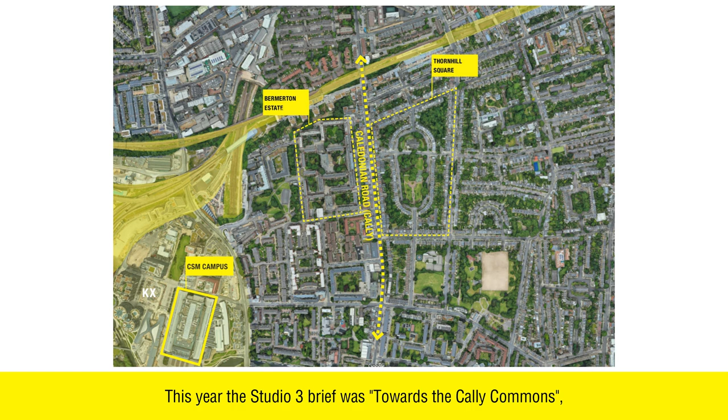This year the Studio 3 brief was Towards the Cally Commons, looking into the idea of the Commons as a catalyser for social change, aimed at improving local equality and sustainability around the Cally, a well-known high street within Islington, only 10 minutes walk from King's Cross. Each student was tasked to explore local resources around the Cally and to imagine how a common city would materialise architecturally.

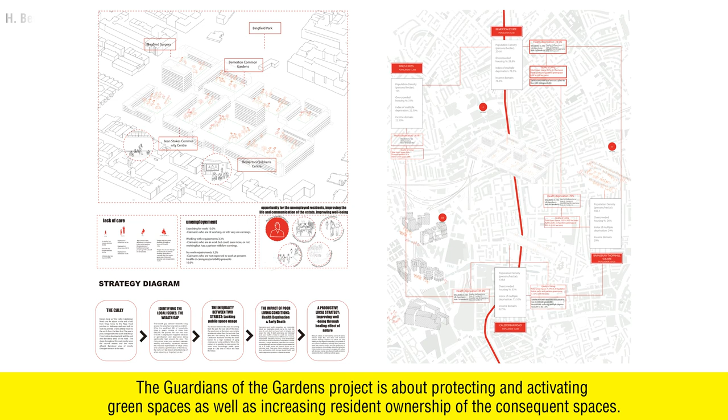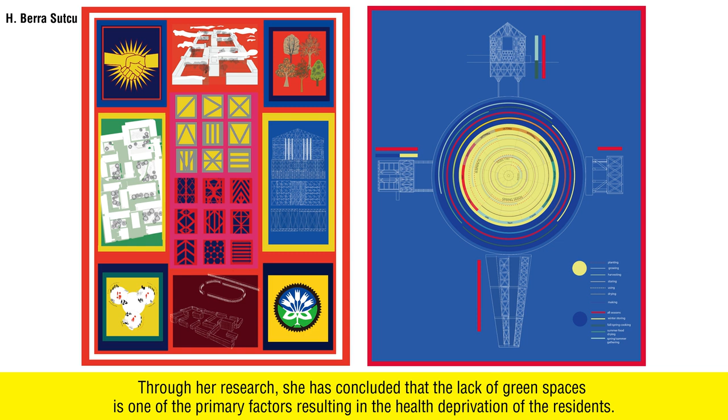Berra's project is titled Guardians of the Gardens. It is about protecting and activating green spaces, as well as increasing resident ownership of the consequent spaces. Through her research, she concluded that the lack of green spaces is one of the primary factors resulting in health deprivation of the residents.

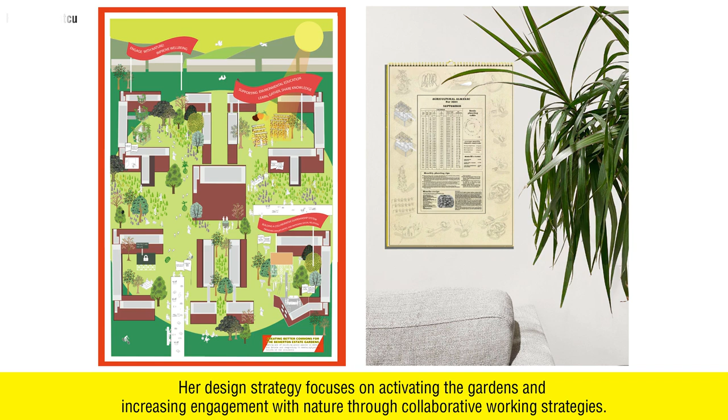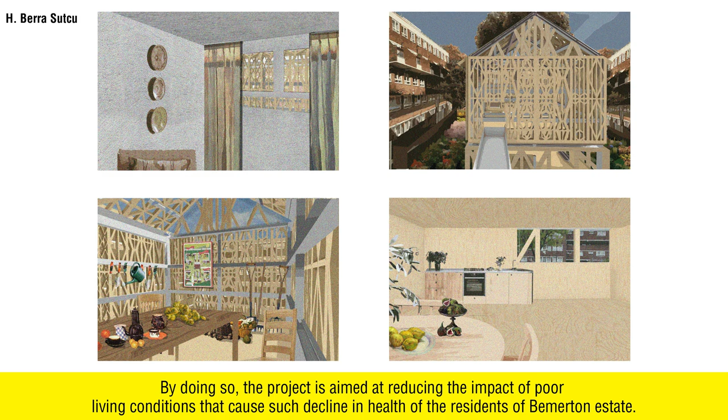Her design strategy focuses on activating the gardens and increasing engagement with nature through collaborative working strategies. By doing so, the project is aimed at reducing the impact of poor living conditions that cause such decline in health of the residents of the Bemerton estate, which is one of the highest recorded deprived areas around the Caledonian Road.

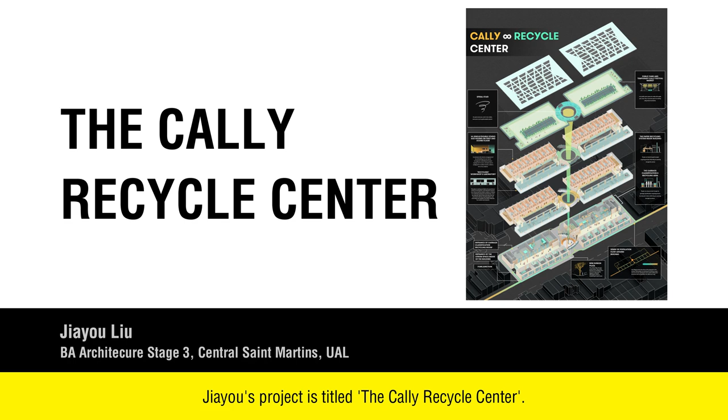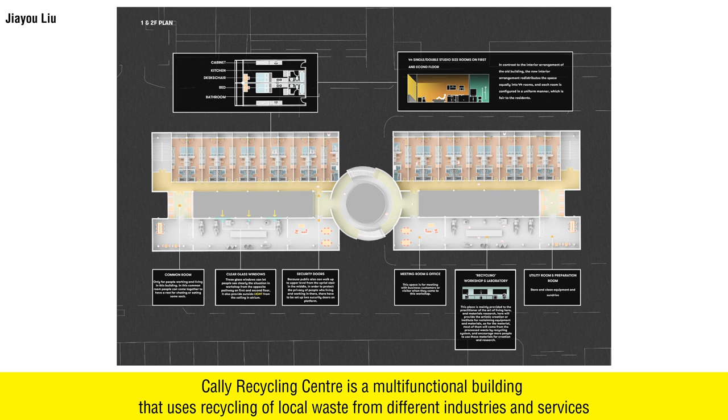Jiayou's project is titled the Cally Recycle Centre. It is a multifunctional building that uses recycling of local waste from different industries and services to develop spaces for commerce, accommodation and education.

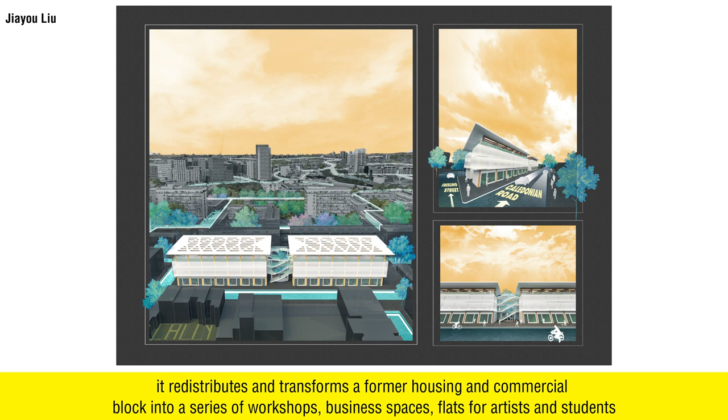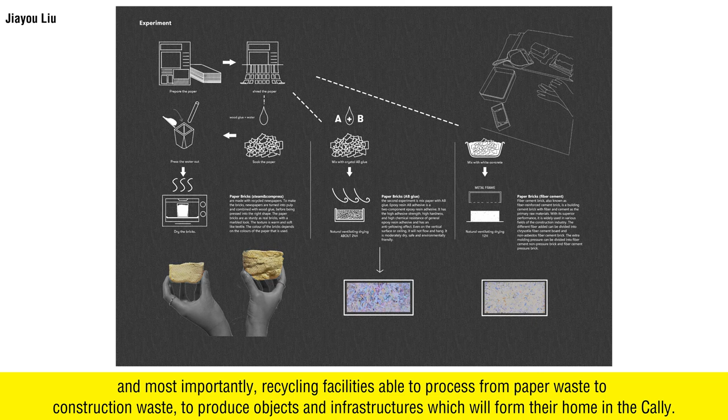While addressing the needs of local people for public space, it redistributes and transforms a former housing and commercial block into a series of workshops, business spaces, flats for artists and students, and most importantly, recycling facilities able to process from paper waste to construction waste to produce objects and infrastructures which will form their home in the Cally.

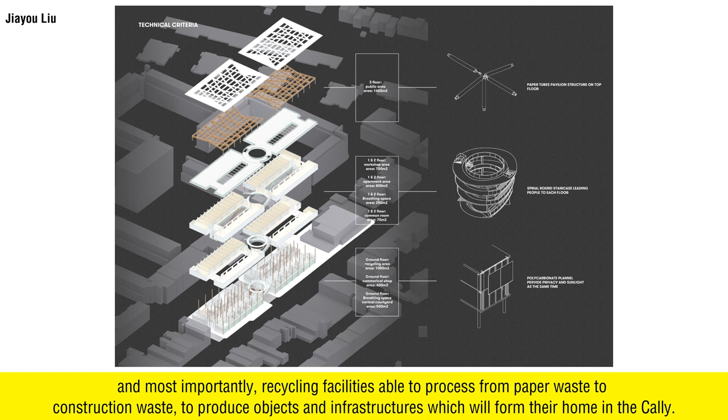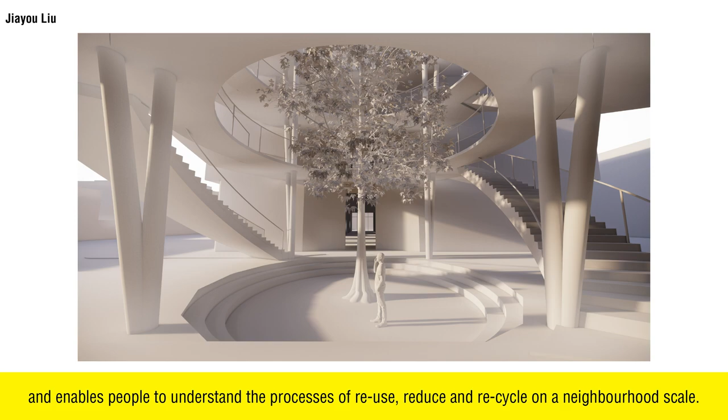In addition, the integration of local recycling systems improves the efficiency of local waste management and enables people to understand the processes of reuse, reduce and recycle on a neighbourhood scale.

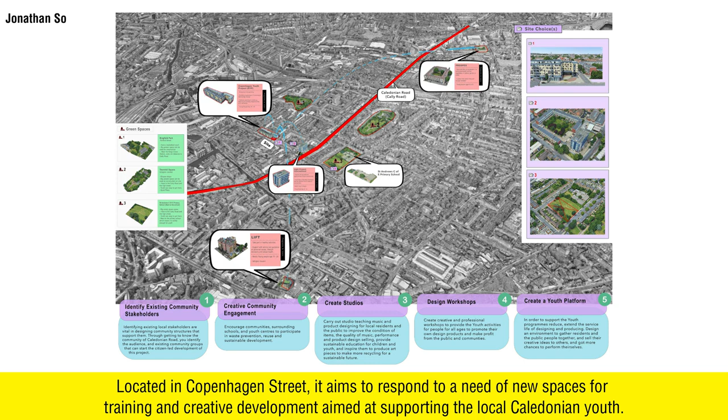Jonathan's project is titled the Sea Youth Square. Located in Copenhagen Street, it aims to respond to the need for new spaces for training and creative development aimed at supporting the local Caledonian youth.

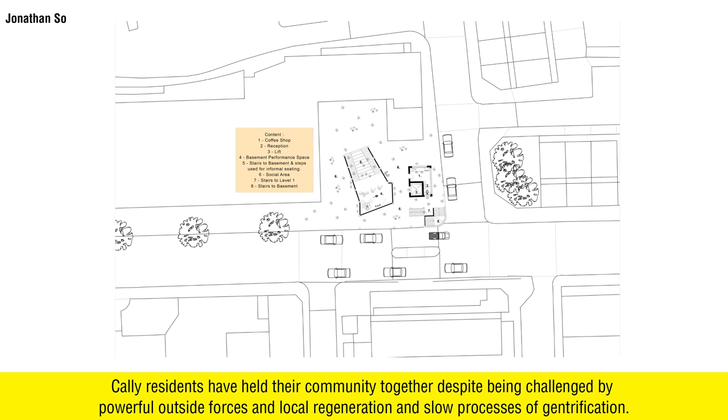Cally residents have held their community together despite being challenged by powerful outside forces, local regeneration, and slow processes of gentrification. Local young people have been greatly impacted by all of these changes, and currently the local authority is looking at creating new spaces for training and skills development.

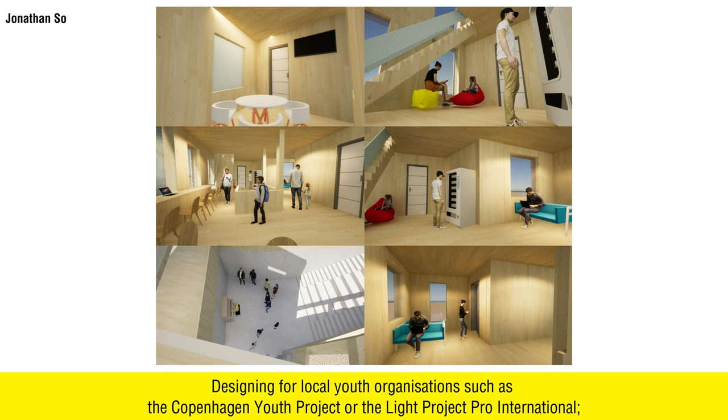The project seeks to create a safe space which is central to Cally Road, which houses a series of key events and spaces aimed to support and inspire young people. Designing for local youth organisations such as the Copenhagen Youth Project or the Light Project Pro International, Sea Youth Square introduces a space for creativity within Cally which is accessible, engaging and flexible.

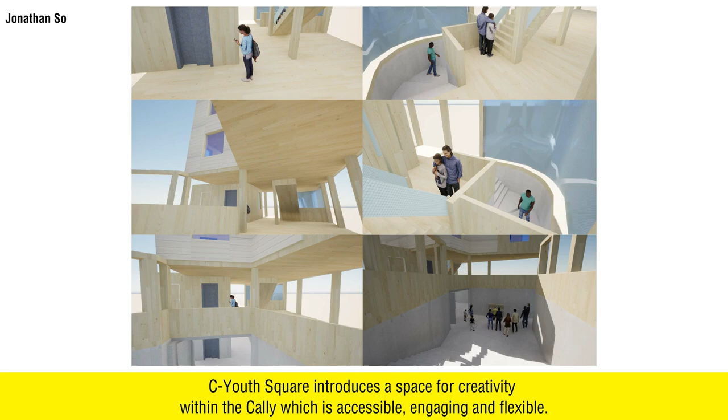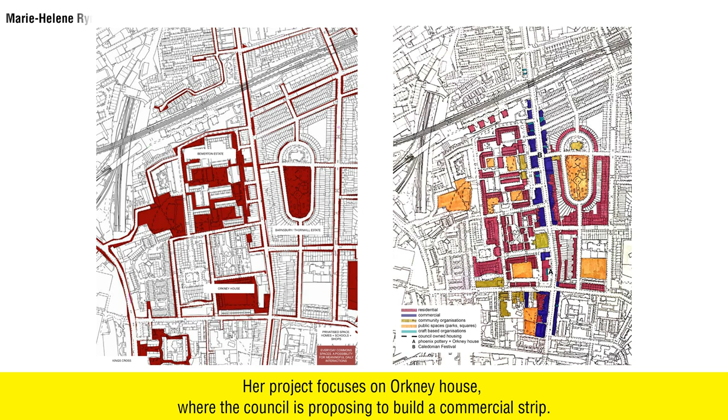Marie-Hélène's project is titled the Orkney Ruins. Her project focuses on Orkney House, where the council is proposing to build a commercial strip. This proposal shows the divide between the council's vision and reality: high crime and poverty rates, and by extension, it is emblematic of gentrification.

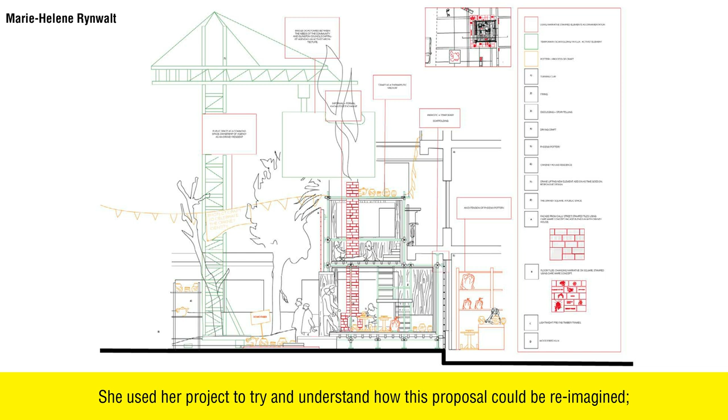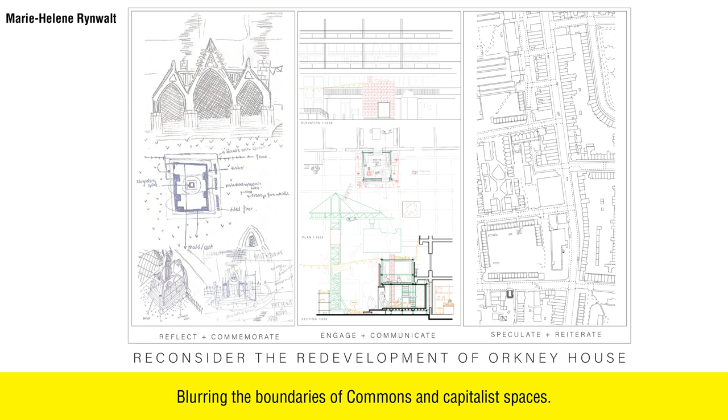She used her project to try and understand how this proposal could be reimagined, to move us towards a more socially driven, less hierarchical way of both building and existing in the city, blurring the boundaries of commons and capitalist spaces. The Orkney Ruins begins as a construction site.

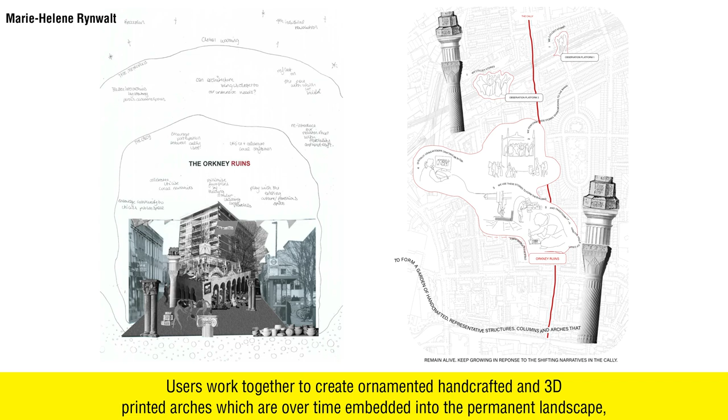Users work together to create ornamented, handcrafted and 3D printed arches, which are over time embedded into the permanent landscape, slowly reclaiming and re-narrating the streets.

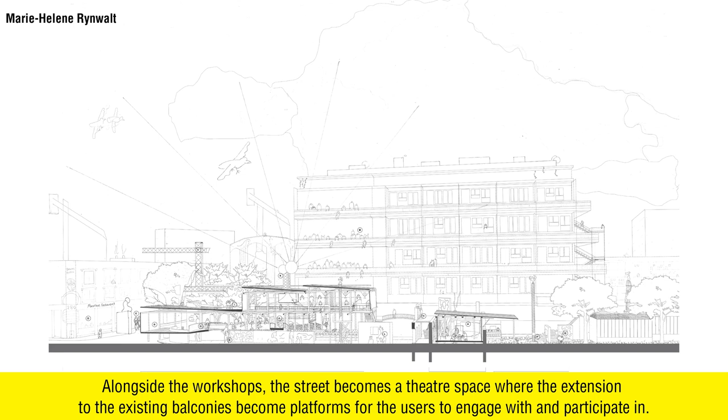Alongside the workshops, the street becomes a theatre space where the extension to the existing balconies become platforms for the users to engage with and participate in. The Orkney Ruins is performative, indirectly asking who we are building for, the metropolis or the people.

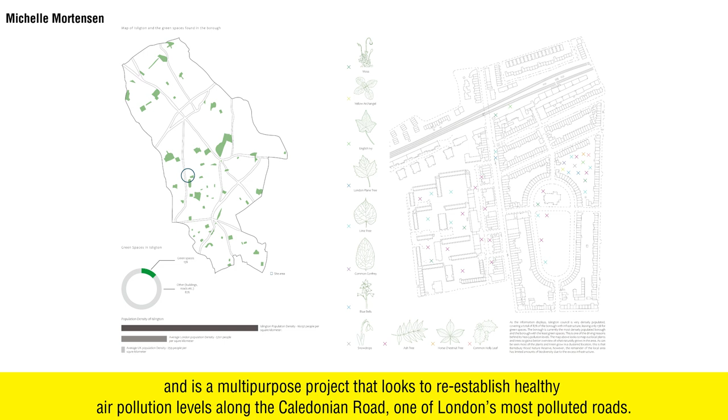Michelle's project is titled Clear the Air, a multi-purpose project that looks to re-establish healthy air pollution levels along the Caledonian Road, one of London's most polluted roads.

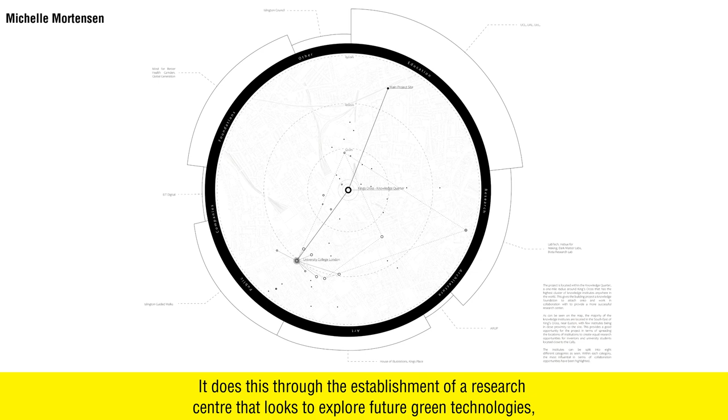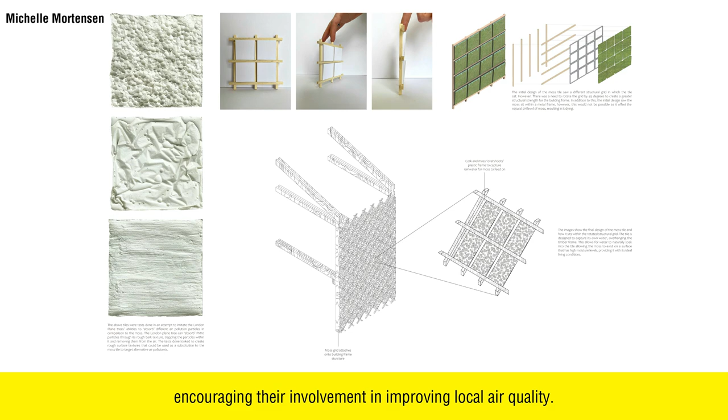It does this through the establishment of a research centre that looks to explore future green technologies, whilst also raising awareness of the severity of pollution levels to local communities, encouraging their involvement in improving local air quality. The project targets three main user groups: researchers, locals, and commuters, to establish a network of collaborating users in reducing air pollution levels.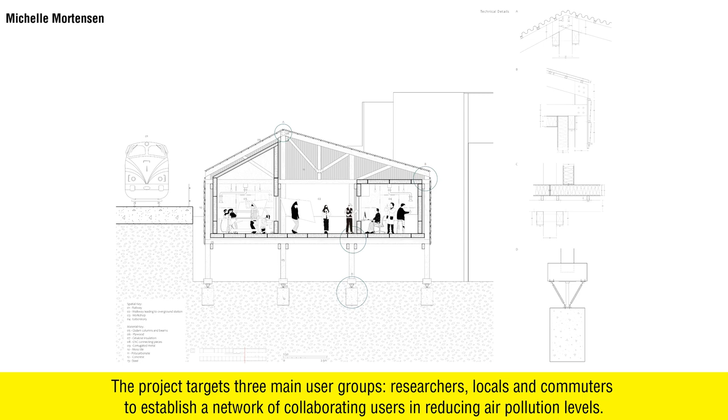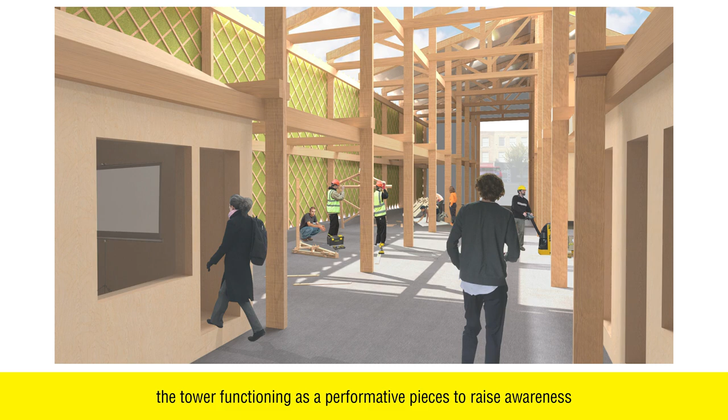The main project building functions as a research centre and a crossover space between all users. The tower functions as a performative piece to raise awareness, and the Cally interventions function as small temporary structures that look to encourage community engagement.

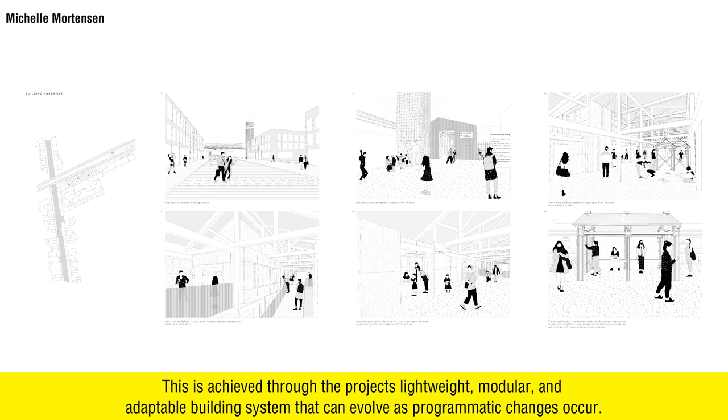The project is designed in a regenerative manner that is suitable for design for disassembly and the circular economy. This is achieved through the project's lightweight, modular and adaptable building system that can evolve as programmatic changes occur.

Nancy's project is titled the Silkscreen Printing Workshop and is a multifunctional textile waste recycling community centre which helps Cally residents and businesses redefine their relationship with textile waste and their neighbourhood.

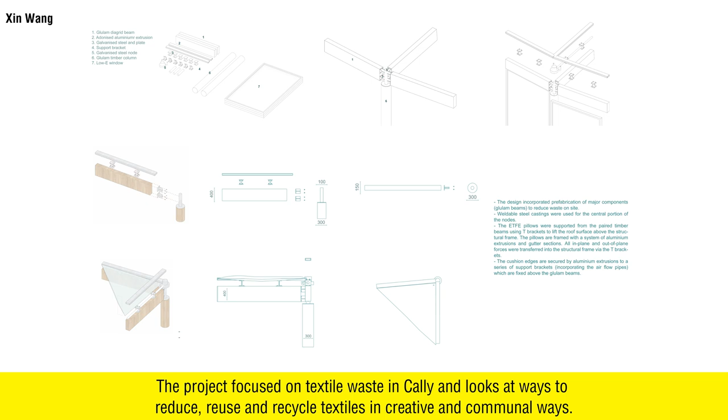The project focused on textile waste in Cally and looks at ways to reduce, reuse and recycle textile in creative and communal ways. The rise of fast fashion has resulted in an increase in consumption, with products having a shorter life cycle and having huge impacts on the environment.

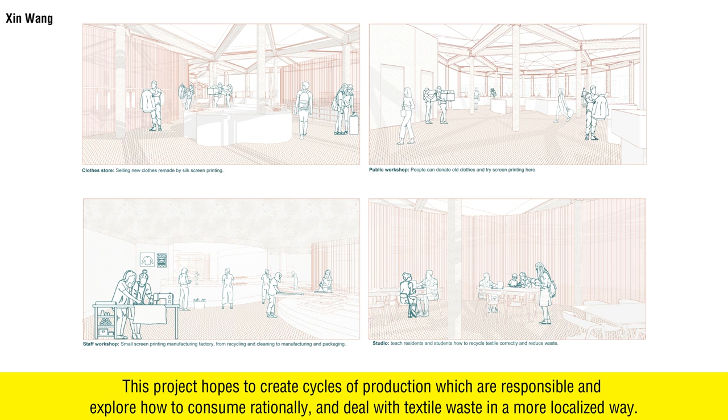This project hopes to create cycles of production which are responsible and explore how to consume rationally and deal with textile waste in a more localized way.

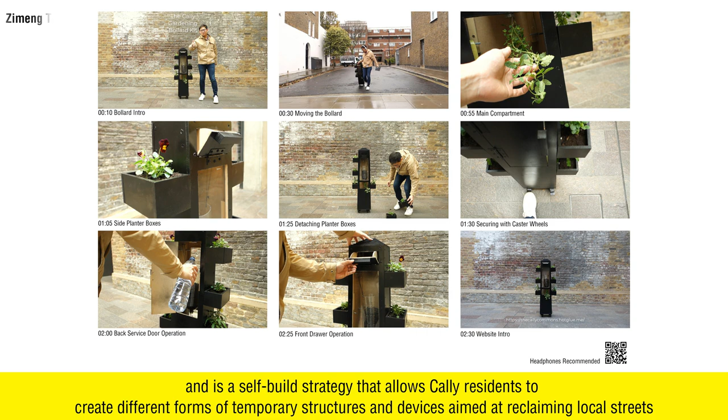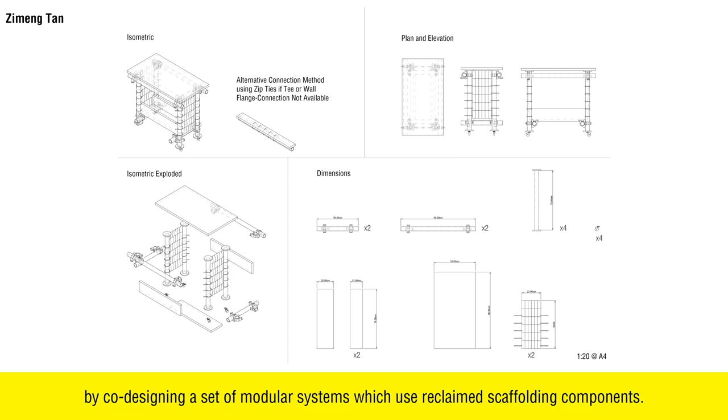Tony's project is titled the Module Distribution Hub and is a self-build strategy that allows Cally residents to create different forms of temporary structures and devices, aimed at reclaiming local streets by co-designing a set of modular systems which use reclaimed scaffolding components. The Module Distribution System Manual was designed to allow residents to take ownership of the system and customize it according to their needs.

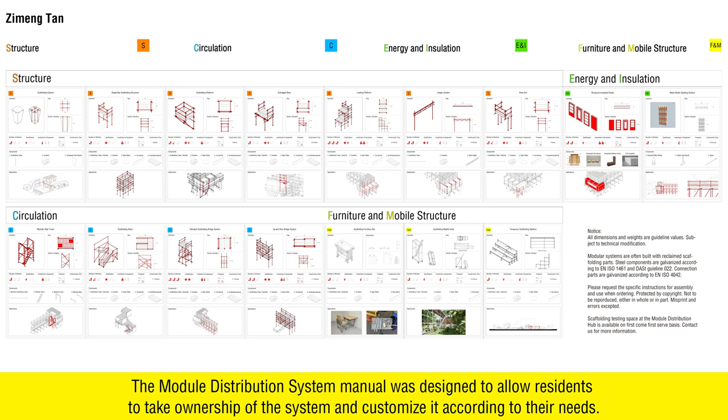The manual is divided into sections, based on the different elements of the construction system. The manual is designed to be open source and easy to access.

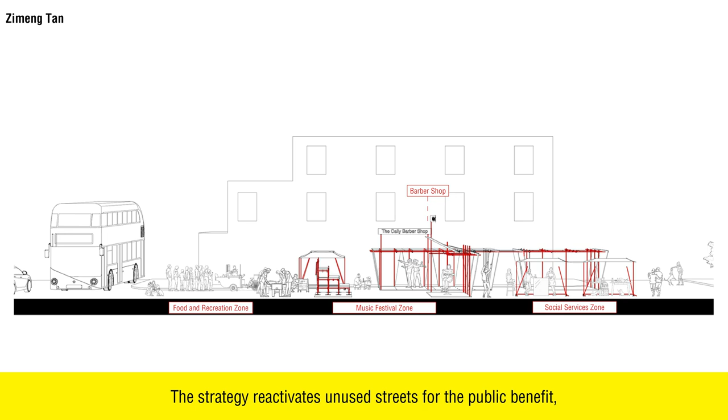The aim of the project is to open a conversation around the protection and celebration of common land in Cally. The strategy reactivates unused streets for the public benefit by creating spaces of direct community engagement to facilitate co-production, collective governance, and co-authorship of a neighbourhood.

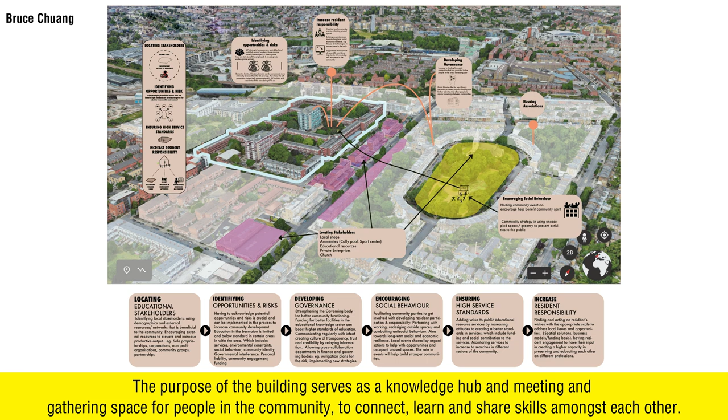Bruce's project is titled the Bemerton Library and is located in the context of the Bemerton estate. The purpose of the building serves as a knowledge hub and a gathering space for people in the community to connect and learn and share skills amongst each other.

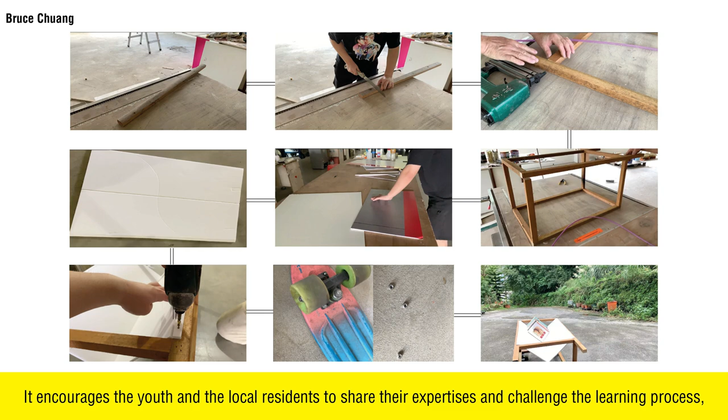It encourages the youth and the local residents to share their expertise and challenge the learning process, moving away from books but becoming more hands-on and practical.

By introducing new forms and processes of learning, the project seeks to improve the living standards of the people at the Bemerton and the Cally.

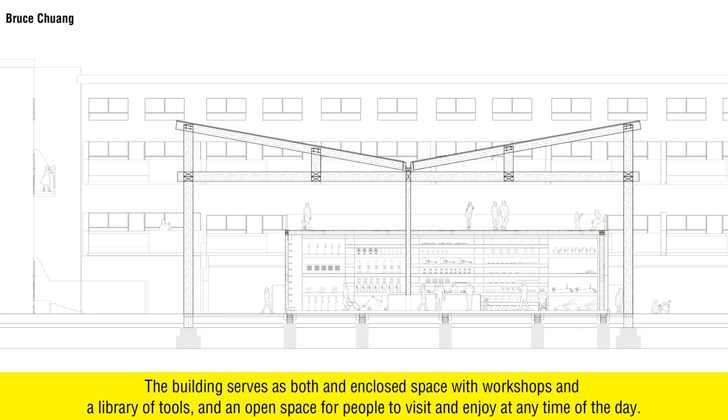The building serves as both an enclosed space with workshops and a library of tools, and an open space for people to visit and enjoy at any time of the day.

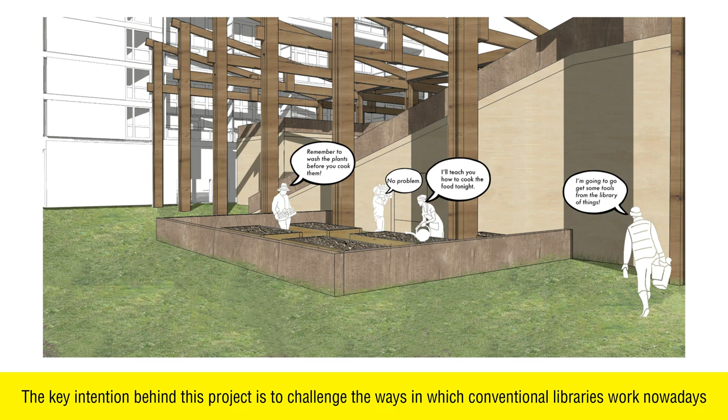The key intention behind this project is to challenge the ways in which conventional libraries work nowadays, and whether we can add or change programs to enable the development of stronger and skillful communities.

Cristina's project is titled Towards the Cally Commons and aims to create a series of work cabins around Caledonian Road that are directly connected to local business.

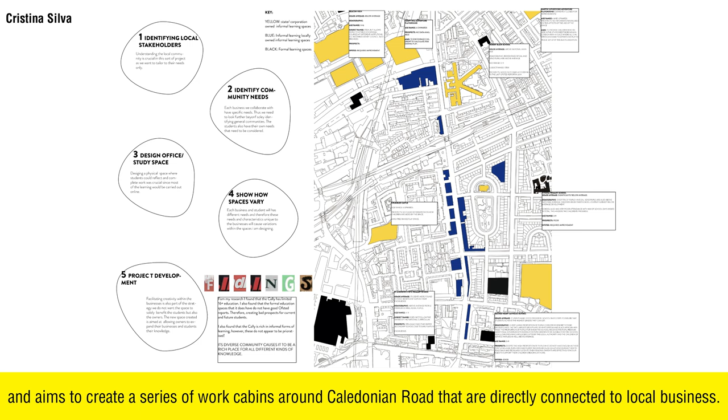These cabins form a bridge between students aged 16 and above and business owners, a link that allows for a balanced exchange of knowledge. Through a placement program developed around these cabins, students can study, produce and collaborate with local business owners.

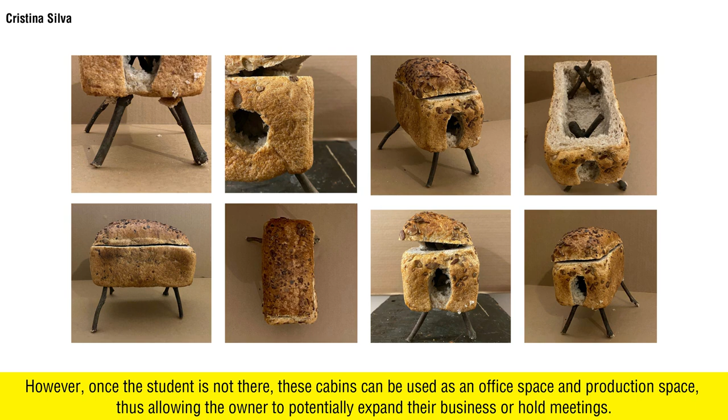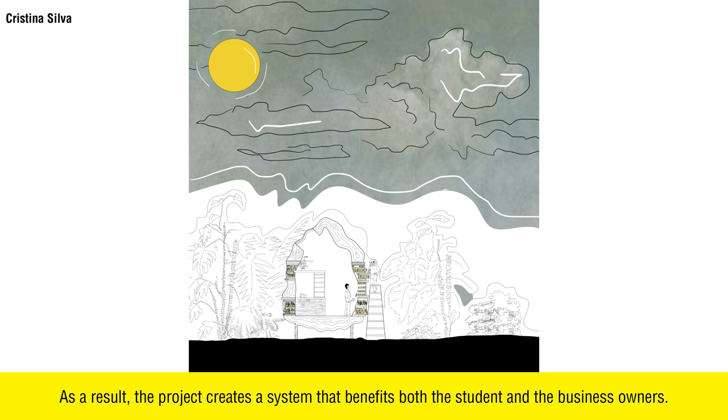However, once a student is not there, these cabins can be used as an office space and production space, thus allowing the owner to potentially expand their business or hold meetings. As a result, the project creates a system that benefits both the student and the business owners.

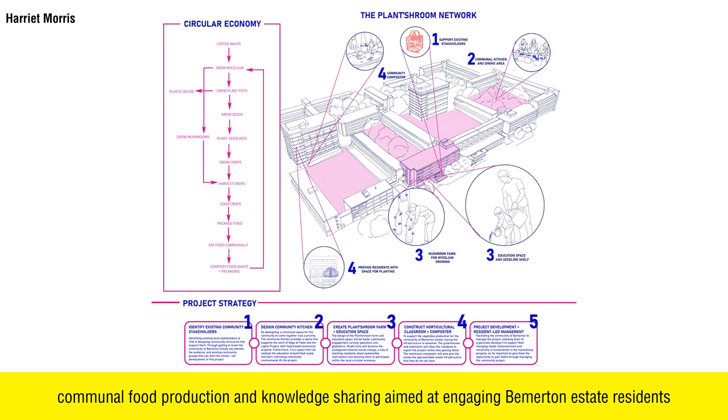Harriet's project is titled Plant'shroom and is a network of green infrastructures supporting large-scale processing of food waste, communal food production, and knowledge sharing, aimed at engaging the Bemerton Estate residents and local schools in learning about the potential of fungi and food waste as sustainable interventions.

The project challenges and explores the role of mushrooms as the protagonist for social change.

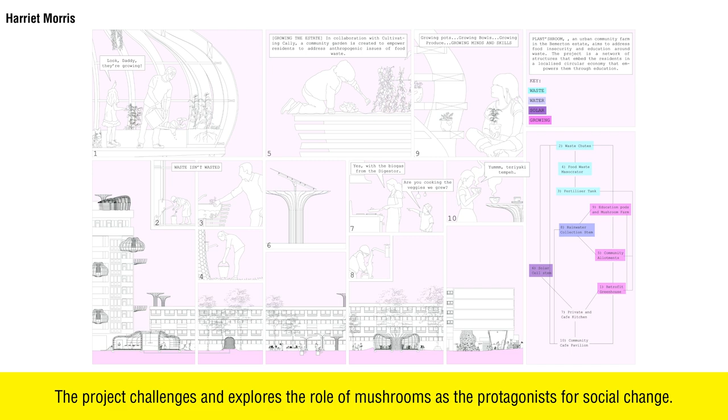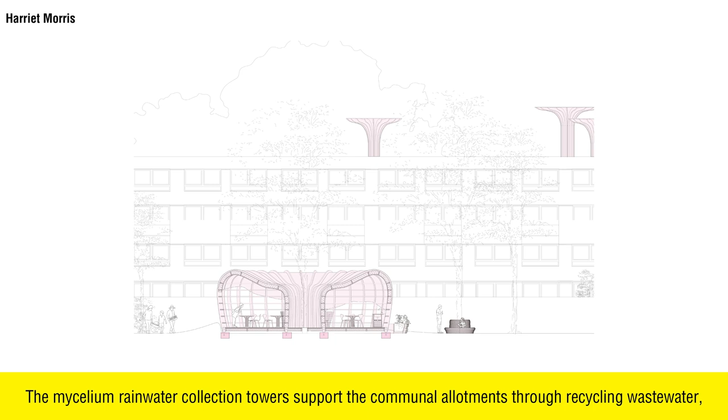The strategy is comprised of an anaerobic digester, a series of water and solar collection towers, a green cafe, education pods, a mushroom farm, and communal planters. The mycelium rainwater collection towers support the communal allotments through recycling of wastewater, increasing the crop yield.

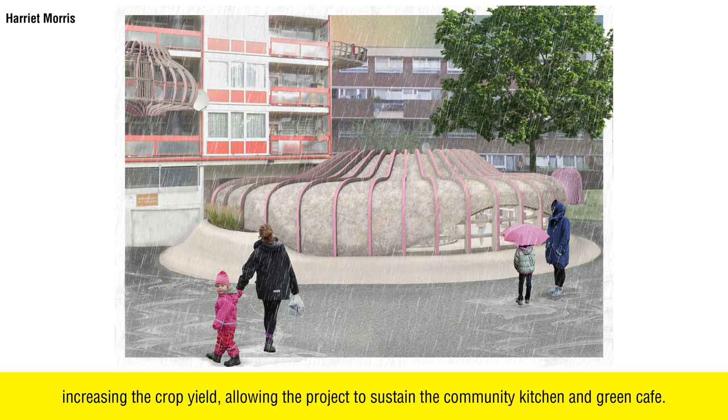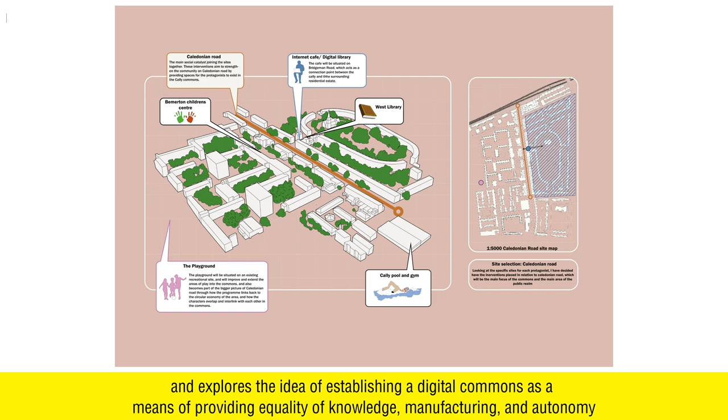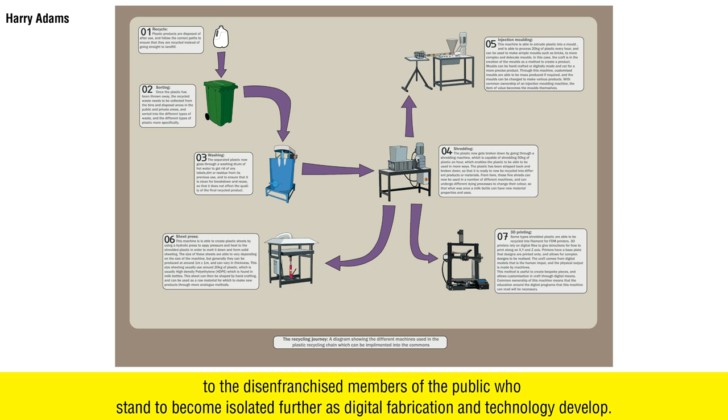My project is titled Caledonian Commons and explores the idea of establishing a digital commons as a means of providing equality of knowledge, manufacturing, and autonomy to the disenfranchised members of the public who stand to become further isolated as digital fabrication and technology develop.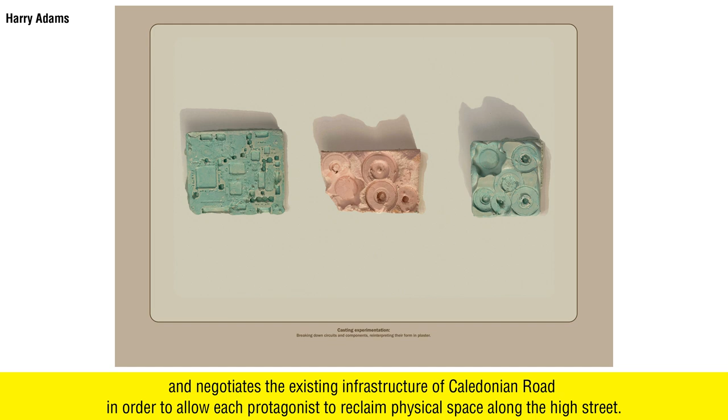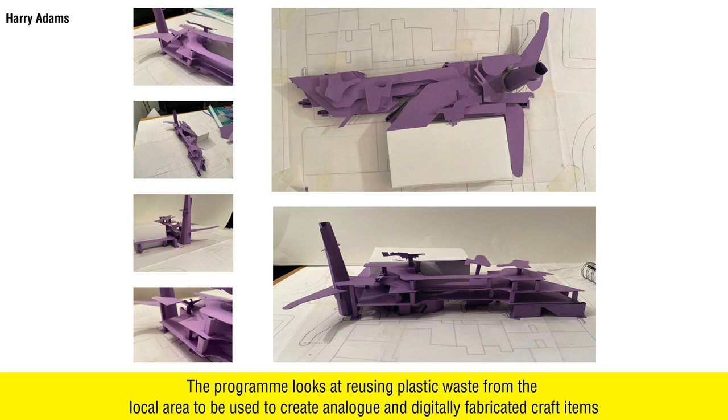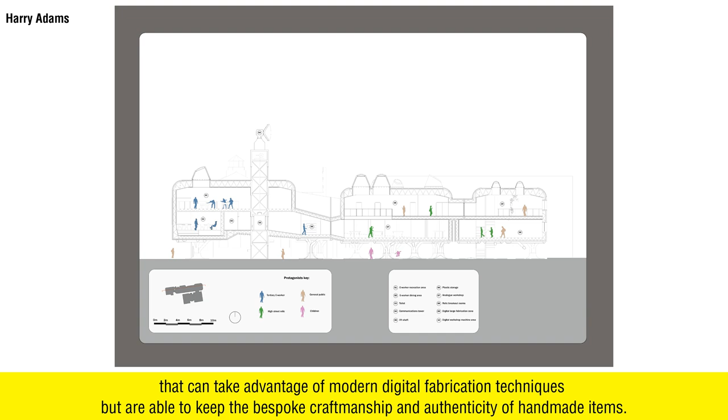These materials are used to create analogue and digitally fabricated craft items that take advantage of modern digital fabrication techniques while keeping the bespoke craftsmanship and authenticity of handmade items. These items range from small handheld objects to larger fabricated objects, created in digital and analogue workshops that are open to the public.

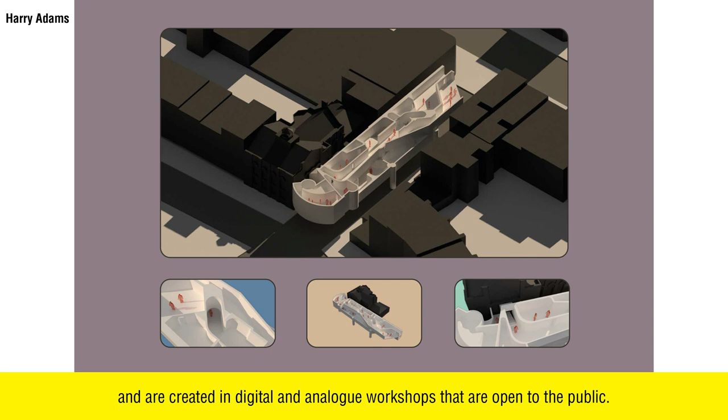The space also contains workspaces, social spaces, and classrooms to educate people around machines and technology.

Sitong's project is titled the Cally Park Pigeon Centre and is a public facility which creates spaces for humans to meet and engage with birds in an urban context.

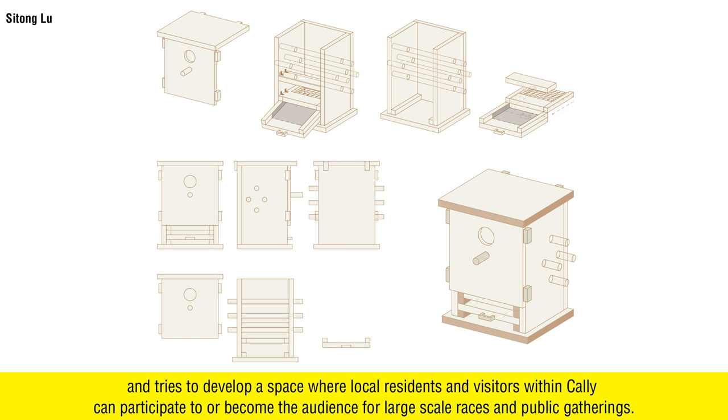The project looks at pigeons and the practice of pigeon racing and the cultures around it, and tries to develop a space where local residents and visitors within the Cally can participate or become the audience for large-scale races and public gatherings.

The infrastructure is comprised of an improved access to the existing clock tower, a visitor centre, and a pigeon training centre where the birds can feed and local gardeners can collect the pigeons' excrements and use them for park allotments.

Stephanie's project is titled the Cally Kitchen and encourages local residents of the Cally to grow their own produce, cultivate, preserve, and cook together through a shared facility in the heart of Cally.

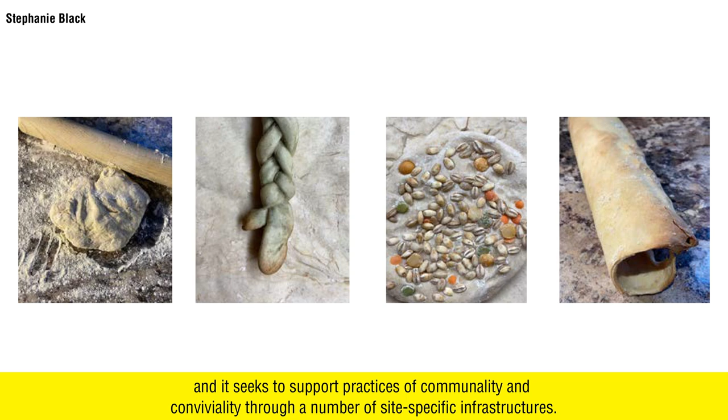The strategy connects to the widely multicultural foods and food practices within the area, and seeks to support practices of communality and conviviality through a number of site-specific infrastructures.

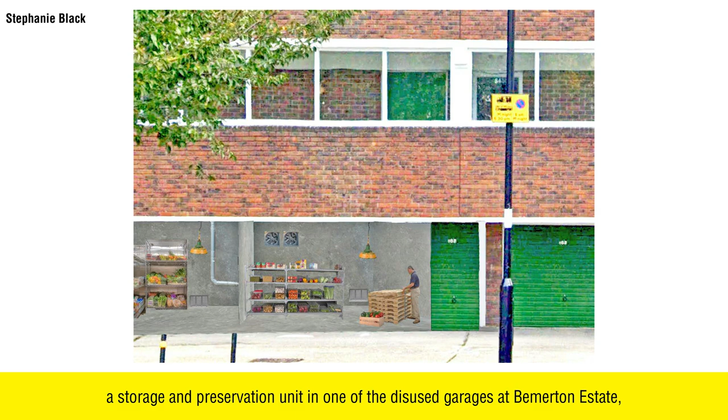The proposal is built around three spaces: a community garden in Bingfield Park, a storage and preservation unit in one of the disused garages at Bemerton Estate, and finally a collective cooking and dining space in Freeling Street.

Tasnia's project is titled the Duckweed Commons and is a collective of different organisations in and around the Regent's Canal which share the management of duckweed and resources that emerge from it.

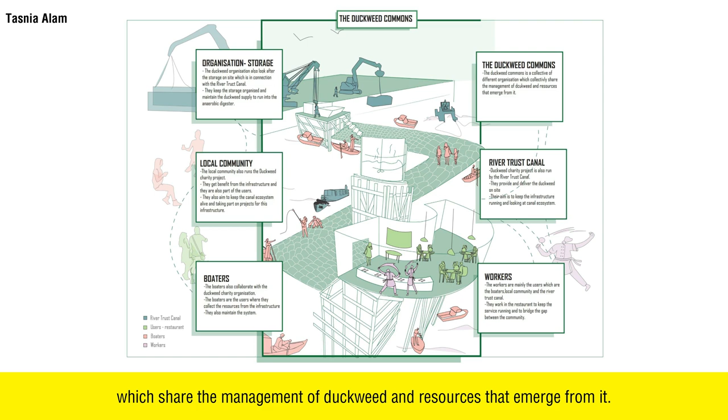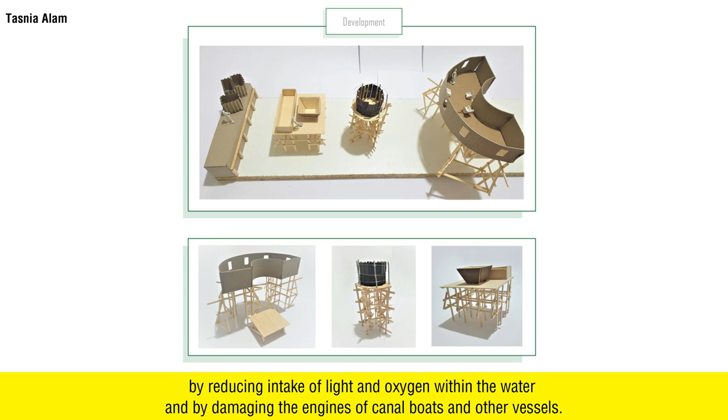The duckweed often causes problems to the environment, especially to local wildlife, by reducing intake of light and oxygen within water and by damaging the engines of canal boats and other vessels.

The project focuses on understanding the networks of stakeholders around the canal ecosystem, finding opportunities for the duckweed to become more productive, allowing common resources which are going to waste to be reclaimed and protected.

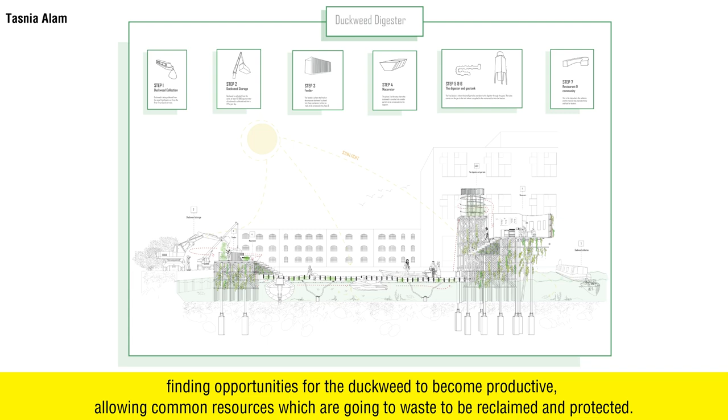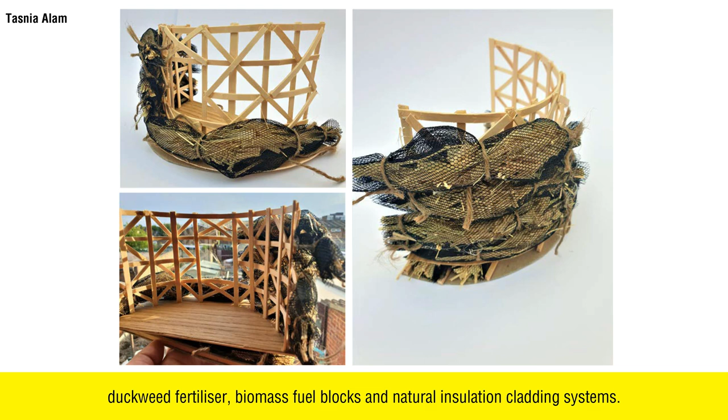The final proposal experiments with the production of edible items to be served at an on-site community restaurant, duckweed fertilizer, biomass fuel blocks, and natural insulation cladding systems.

The project also tests technologies such as anaerobic digestion and harvesting of solar power, which support the whole system.

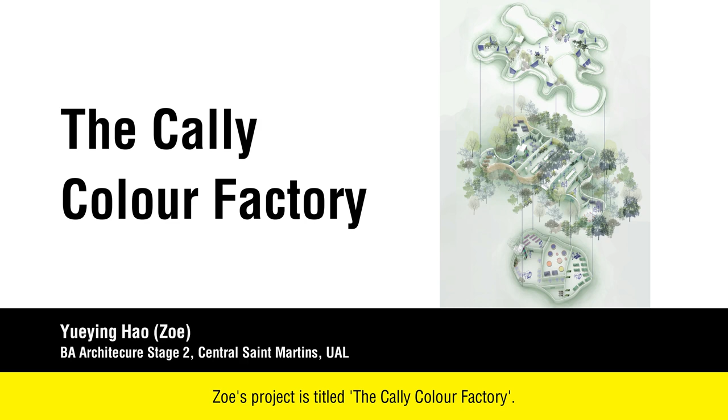Zoe's project is titled the Cally Colour Factory and looks at creating a space for local young people and families to explore the creative benefits behind the processes of natural dyeing and natural pigments.

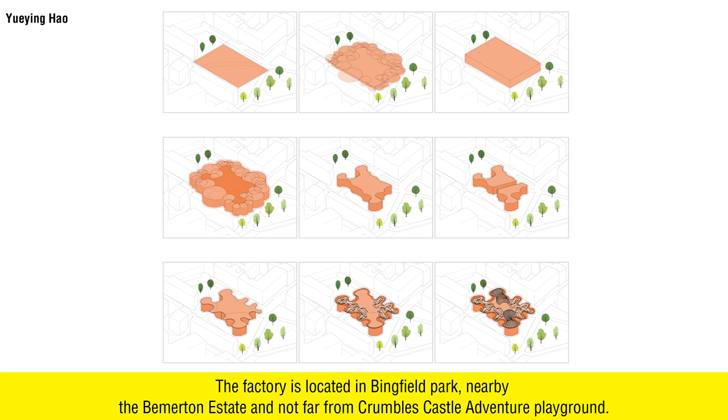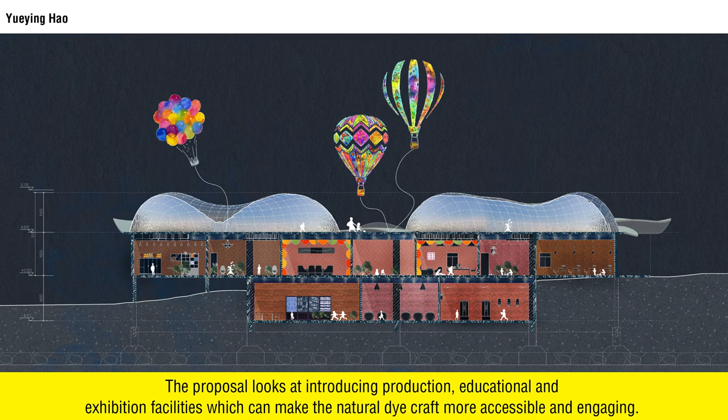The factory is located in Bingfield Park, nearby the Bemerton Estate and not far from Crumbles Castle Adventure Playground. The proposal looks at introducing production, education and exhibition facilities which can make the natural dye craft more accessible and engaging.